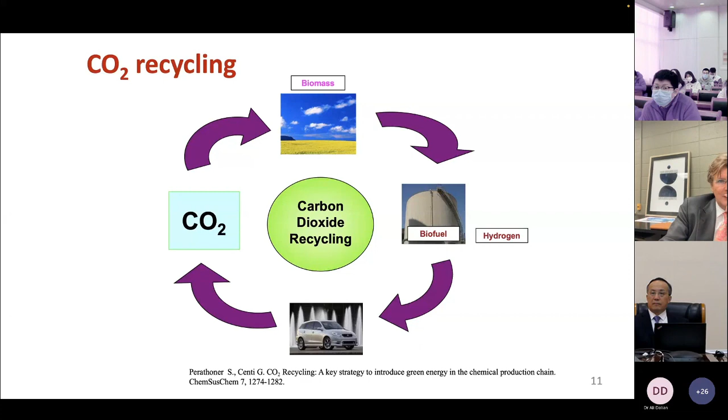Now, our applications work with a variety of systems, but I wanted to share some of our research related to hydrothermal gasification, especially supercritical flames. I did so because that's the subject Professor Fang initiated quite a long time ago, more than 20 years ago, back in Canada. I believe he was, if not the first, one of the very first people in Canada to introduce this subject in research, and we were delighted, my research group and I, to interact with Zen throughout the years.

Supercritical water is essentially water at relatively high pressure and not very high temperature, above 374 degrees C and around 218 atmospheres. It's a terrific medium because it's perhaps the best solvent you can imagine. We tested a variety of organic materials, and it takes really just a couple of milliseconds to dissolve the organics in supercritical water. Very, very powerful.

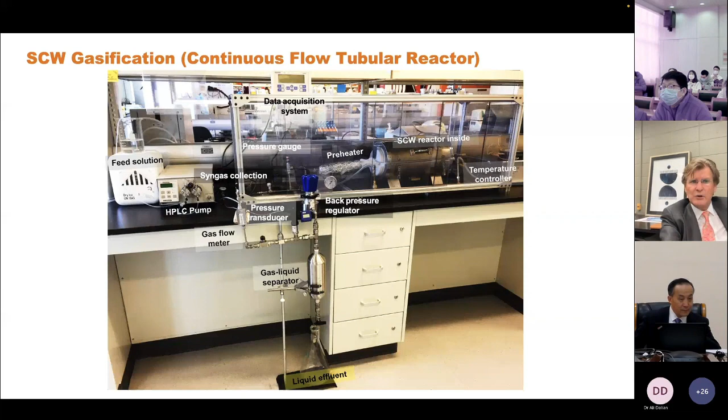We did a variety of applications, including very small applications such as the diamond anvil cell, around 500 microns in diameter, 200 microns in depth. We conducted experiments in a variety of continuous and batch flow reactors.

We used a Canadian Light Source synchrotron in order to conduct a variety of analyses in supercritical water. A synchrotron is a terrific advanced analytical technique because it allows you to measure many different things on one sample. Essentially, for a student, there are electrons running around, and several different beamlines - in our case, I think there are 28 of those beamlines - and you can analyze properties of your samples, collecting radial and axial profiles. So it's a very powerful tool. Importantly, at least in our case, it's paid for by the government, so it is relatively free of charge to researchers.

Now, those approaches allowed us to develop a variety of mechanisms of behavior of different biomasses. I'm not going to go into details here, but essentially what we wanted to do is develop a mechanistic model in order to understand a variety of physical phenomena and chemical reactions to get the type of products we wanted - starting with biomass, hydrolyzing it, catalyzing it, and then gasifying it.

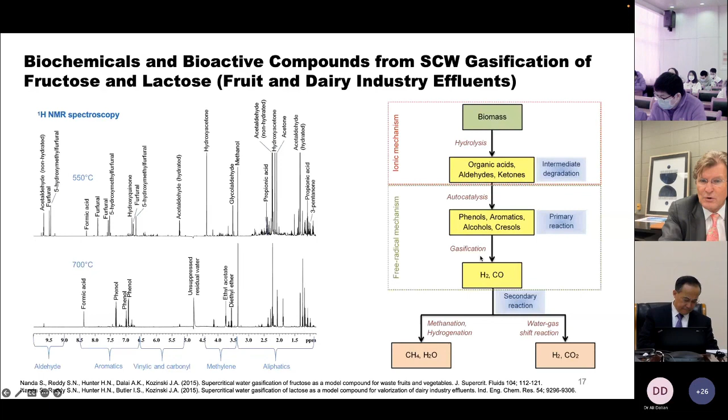In our case, the purpose was to develop either a synthetic gas, which is a combination of hydrogen and CO, and later on what we really wanted to do is focus on generating hydrogen - not just generating hydrogen per se, but rather generating hydrogen on demand. So it's just in time and just in case, in order to avoid costly storage. That's the mechanism we were able to develop.

And at the same time, if you deal with biomass, you're going to have some solid residue. We were able to develop a process for biochar that allowed us to delignify the original biomass samples, reshaping the solids so they could be used in a variety of practical applications, such as in house buildings, for example.

However, perhaps the most intriguing and interesting approach we were able to develop is working with hydrothermal flames. Now, why is it important?

That's the work that we've done with NASA. The Canadian Space Agency and NASA are interested in applying hydrothermal flames to deal with a variety of applications in space at zero gravity. We were using different organics, mixing with oxidants, and then initiating ignition using hydrothermal flames.

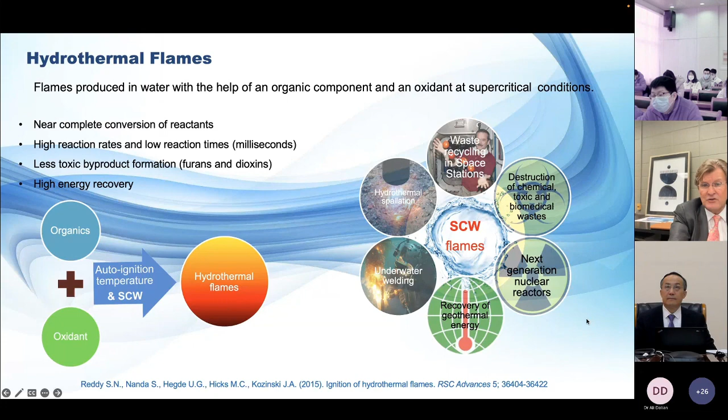In the more distant future, there's another work we're conducting on the next generation of nuclear reactors, generation 4 nuclear reactors, and we tentatively obtained some interesting results, although still preliminary, with regards to significantly increasing the efficiency of that generation of nuclear reactors. Countries like China or Canada are investing quite a lot in nuclear energy, so it would be quite important to understand these applications.

Now, the experiments that we are conducting are being conducted in the reactor that was developed, designed, and manufactured at NASA, and then shipped to us here in Canada. It's a beautiful piece of engineering. Essentially, the key element of it is here.

This is the reaction chamber that allows us to both monitor and collect samples from the reaction area where we develop a flame, and we're able to measure temperature both along the flame axis but also across the flame radius. So that is the essence of the SCW, NASA's SCW flame machine.

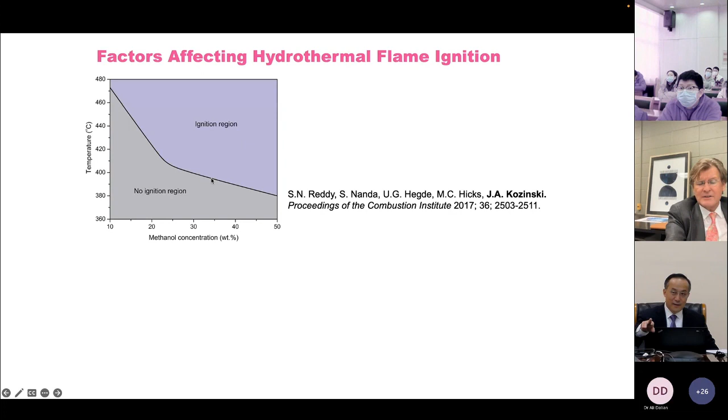We are now working on the next generation of it. Whenever you work with flames, and especially very exotic and unorthodox flames in water, especially supercritical water, the key element to understand is ignition. How to go from no ignition region to ignition region is going to be critical, especially as we potentially would like to use this kind of propulsion for Mars rovers some years in the future.

There are a variety of parameters that define the behavior of flames and also influence ignition. In general, what we would like to do is ignite those unorthodox flames at as low a temperature as we can and as quickly as possible. So we analyze a variety of those parameters, and I'll show just a few that are perhaps important.

One of the key parameters was the temperature of the oxidizing agent. In our case, we were using a variety of oxidants - it could be hydrogen peroxide, oxygen, or air - and depending on the temperature, the higher the temperature of the oxidant, the lower the ignition period, and it's a significant difference, almost 3 times lower. That translates to tremendous savings from the economic perspective.

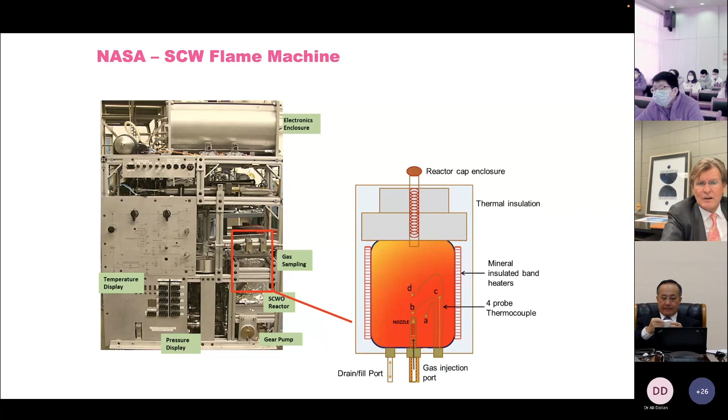For the type of hydrothermal flames, some simple fundamental observations are not very easy to get done, especially if we want to make sure we properly understand the parametric studies, because of course, how it works - you have to fix all of the other parameters and then see how the temperature influences the parameter you're interested in, and then you have to multiply those experiments and involve other parameters.

Then what I wanted to do is very quickly share with you the tests that we were conducting together with NASA at zero gravity. You have 5 minutes. Yes. Oh, that's perhaps the last slide.

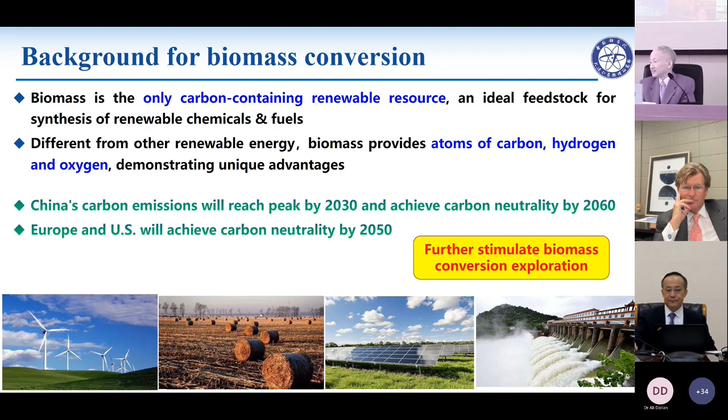China, probably you know, declared it will reach carbon peak by 2030 and achieve carbon neutrality by 2060. This is a very big country, and also we are a developing country, so this is a very tough task for our country. But this carbon neutrality policy will further stimulate biomass conversion exploration research, not only in China but also around the world. Europe and the United States also declared carbon neutrality by 2050. This is China's strategy about carbon neutrality.

China is a very big country, so we need different kinds of energy. Any one kind of energy is not enough for China. So now, oil, we import more than 70%, and natural gas about 50%. And coal, we are very rich in coal, so we can use it for several hundred years. This is our main energy source.

But now in China we are developing wind and solar energy, ranking number one in the world. We also pay much attention to biomass, so this is renewable energy in China. We also pay much attention to nuclear energy. We are very happy to know the United States declared yesterday a very big breakthrough for nuclear energy, and we also have a very big team working on nuclear energy in China. So this is a comprehensive system in China. We need to combine all the fossil energy, renewable energy, and nuclear energy together to build a comprehensive energy system.

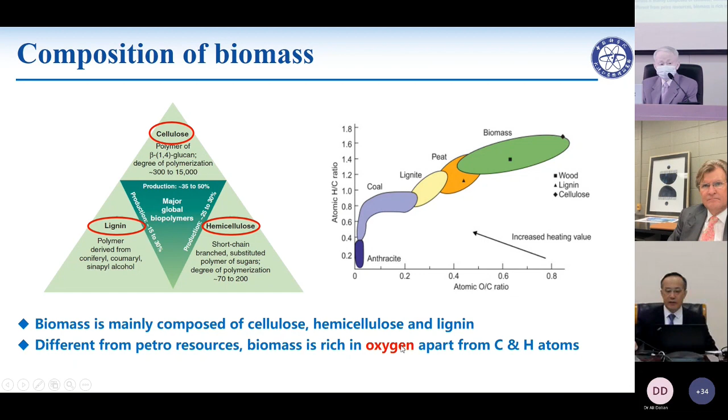Biomass is mainly composed of cellulose, hemicellulose, and lignin. Particularly, oxygen is present apart from carbon and hydrogen. This is a very unique property of biomass.

So why biomass to glycol? Because the title of my presentation is ethylene glycol. Glycol is oxygen-containing, so we can use all the atoms, not only carbon and hydrogen, but also oxygen. So this is ethylene glycol and 1,2-propylene glycol — crucial bulk chemicals.

Currently, ethylene glycol is produced from the petroleum source. The consumption of glycols is more than 30 million tons per year, and it has increased about 5% every year during the last decades. The catalytic conversion of biomass to ethylene glycol is highly attractive due to its renewable feedstock, high atom economy, and green process. So we pay much attention to producing ethylene glycol from biomass.

The challenge in biomass conversion to ethylene glycol involves hemicellulose and lignin. Particularly, we pay much attention to cellulose, which accounts for more than one-third of lignocellulose.

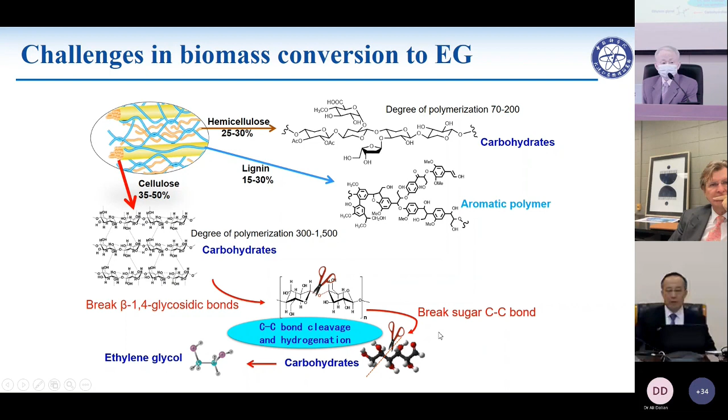So the challenge is to break the beta 1,4 glycosidic bond to produce polysaccharide, and then to break the carbon-carbon bond to produce such kinds of carbohydrates. Then, further breaking the carbon-carbon bond and doing the hydrogenation reaction, we can produce ethylene glycol. This is a very promising reaction, but we have many challenges in how to selectively convert the beta 1,4 glycosidic bond and how to selectively convert the carbon-carbon bond.

I mentioned ethylene glycol is currently from the petroleum route, produced from ethylene in the majority of cases. Also in China, because coal is very rich, we can produce ethylene glycol through carbon-one chemistry: from coal to produce syngas, and then from syngas to produce ethylene glycol. But now biomass is challenging yet very promising, because we can use not only carbon and hydrogen, but also the oxygen in the biomass. So this has very good atom economy, and we pay much attention to this process.

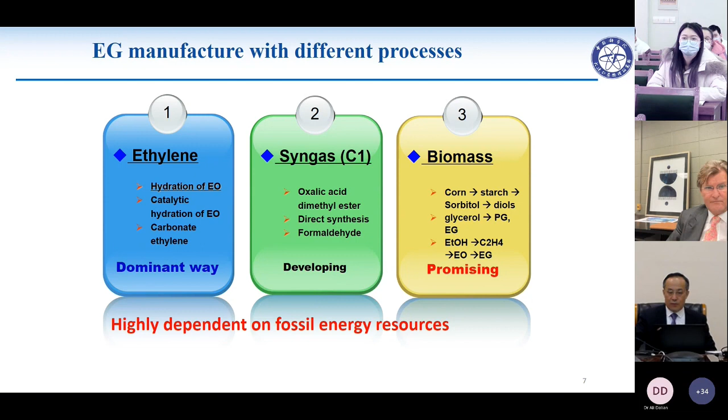We are very lucky—one of my students, Miss Ji Na, is now a professor at Tianjin University in China. 14 years ago we published a paper in Angewandte Chemie; now it's more than 15 years. We were very lucky to find a very unique catalyst: nickel-promoted tungsten carbide supported on active carbon. So we can go from cellulose in one pot to produce ethylene glycol. This is a very new reaction, and we are very happy to discover it. We also filed several patents during the last decades for this new process.

After the first paper, we needed to understand the reaction mechanism—why we can use such a catalyst to selectively convert cellulose finally into ethylene glycol. Now we understand the first step: using an acid catalyst to do hydrolysis from cellulose to produce polysaccharide or glucose. Then we have a retro-aldol condensation reaction by the tungsten catalyst, which produces glycolaldehyde. This is a very important intermediate compound for our process. Then from glycolaldehyde, by ruthenium or nickel hydrogenation reaction, we can produce ethylene glycol. This is a very interesting new reaction from cellulose to produce ethylene glycol.

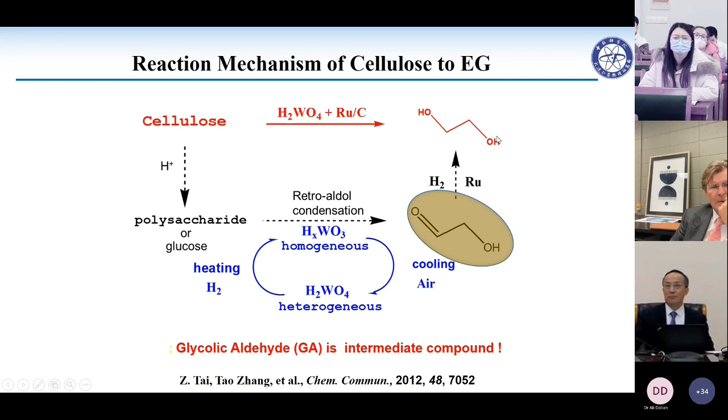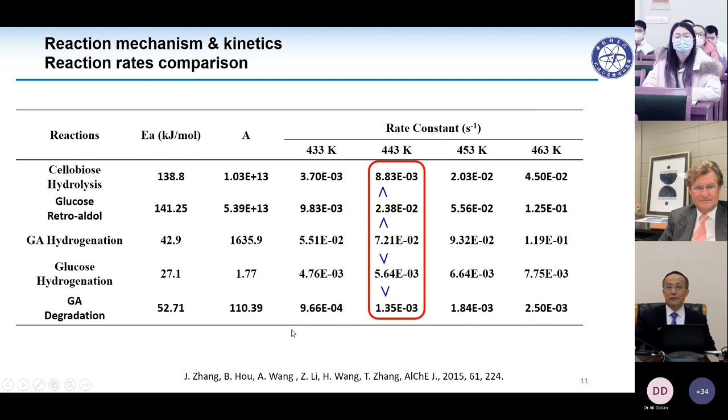We also did a very detailed kinetics study, comparing reaction rates for different steps: cellobiose hydrolysis, retro-aldol reaction, glucose hydrogenation reaction, and glycolaldehyde degradation. Our results show that the glycolaldehyde hydrogenation reaction rate is very fast compared with the retro-aldol reaction, and very fast compared with the hydrolysis reaction. So the hydrolysis reaction is the rate-determining step.

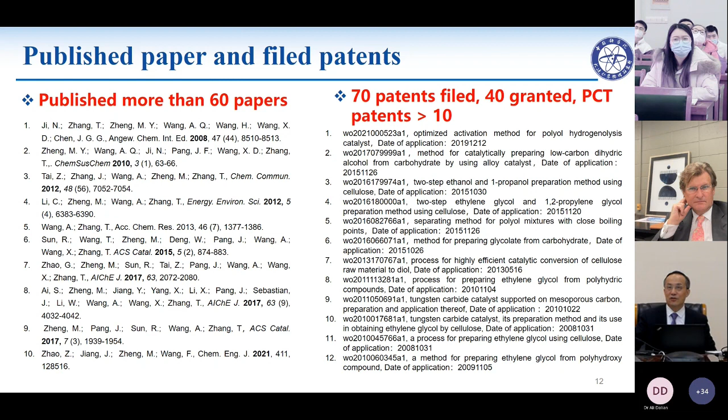During the last decades, we published more than 60 papers to study the details of such kind of reaction, and we filed 70 patents. We tried to commercialize such kind of process, so we filed a lot of patents during the last decades.

Because of time limit, I would like to mention several milestones for our new process. We started the research of biomass conversion from 2006. After 2 years, we discovered a new reaction for cellulose to produce ethylene glycol. We did a very detailed study of the reaction mechanism, and we designed and obtained a low-cost catalyst.

This is very key, very important for the commercialization reaction. We also needed to try our whole biomass conversion, because the fundamental research used pure cellulose. But for the commercialization process, we need to use the whole biomass, and we also need to design a highly efficient process.

For the industrial demonstration during the last 4 years, from 2018 to this year, we used about 3 to 4 years to make an industrial demonstration in China. We are almost close to success for this new process.

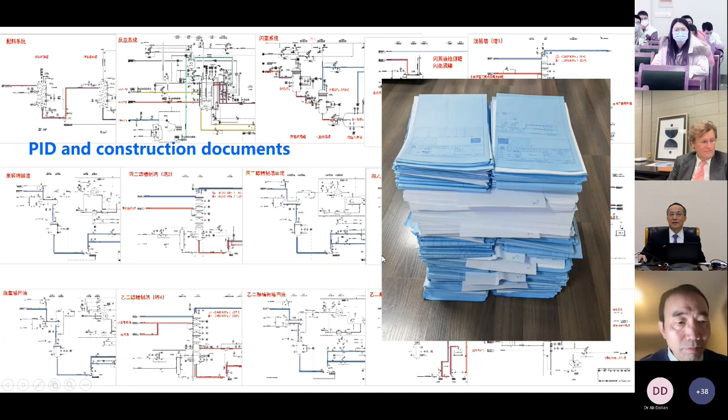This is a huge work for the design of such a 1,000 ton pilot plant. You can find the design documents - it's a huge amount. And also the construction site involved a lot of work.

The container, reactors, and finally, by the end of last year, we finished the construction. Our pilot demonstration is a 1,000 ton per year cellulose to bio-EG plant in Henan, Puyang, China. This is probably the first pilot demonstration from cellulose to bio-ethylene glycol in the world.

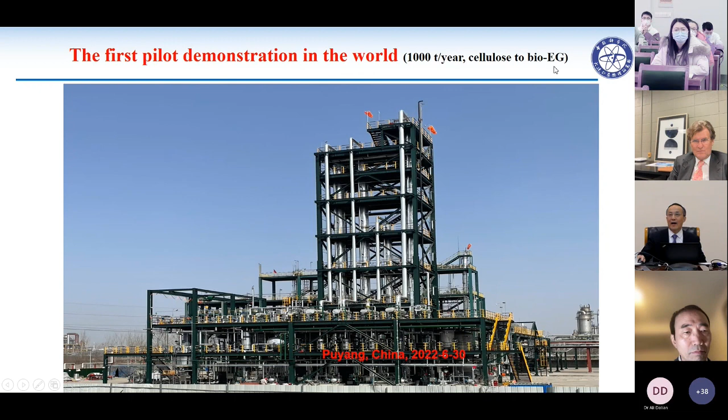This is our product, bio-ethylene glycol. You can find the purity - the selectivity is very good. We can obtain about 85% selectivity. The purity is more than 99%.

I would like to try to summarize our DLEG pilot demonstration. The design of the reactor at a metric scale is verified. Using this kind of reactor, we can obtain very good mass and heat transfer.

The catalyst performance has also been verified. The selectivity to ethylene glycol is higher than 85%, even better than the result in our laboratory. The result from the pilot at 1,000 ton per year has better selectivity than our laboratory result, which was about 70%.

The product distillation system is also tested. We can now have a purity of more than 99%. In the near future, we will improve our distillation process so we can obtain even higher purity for the ethylene glycol.

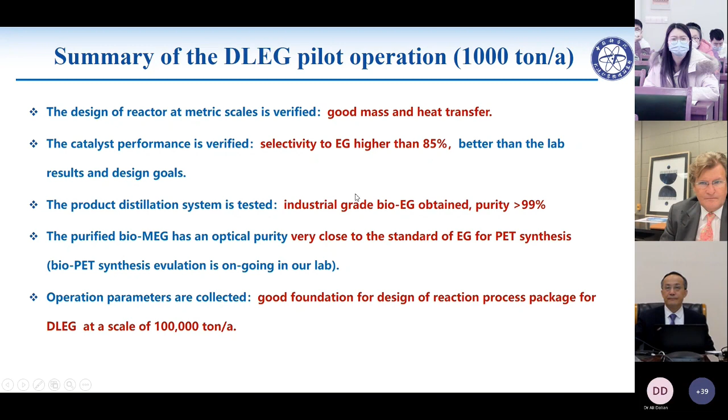Now for the perspective and conclusion. You can find our systematic study and endeavors have been made on our new process for biomass conversion to ethylene glycol over the past decades. This progress includes the robust and low-cost catalyst, reaction kinetics, highly efficient reaction system, feedstock influence on the reaction, and bio-EG purification and application for PET synthesis.

These paved a solid way for DLEG process application at a large scale in the near future. The pilot at a scale of 1,000 ton per year has been built and operated successfully, making a good foundation for DLEG industrial application in the near future, to promote the DLEG... Okay, almost finished.

I would like to mention some opportunity and challenge for whole biomass conversion. So the industry currently, based on biomass and fossil energy, you can find petroleum, natural gas, and coal. You can produce gasoline, kerosene, diesel, benzene, toluene, xylene, and more.

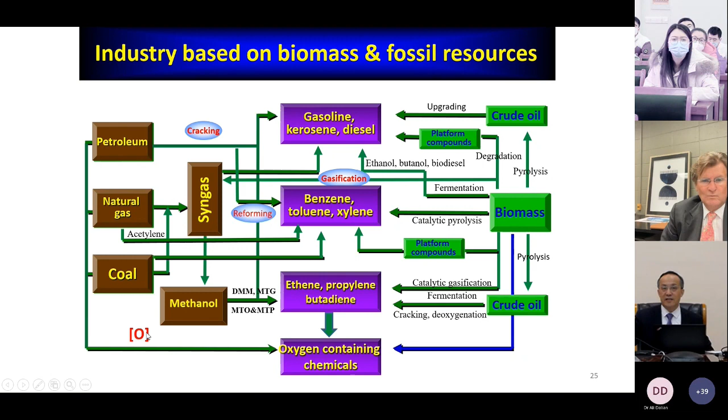But for oxygen-containing chemicals, now from petroleum, you need to do an oxidation reaction to put in the oxygen. For biomass, this is very good because you don't need to do oxidation. So this is very unique about biomass for producing oxygen-containing chemicals.

The advantage is that oxygen is very important for biomass conversion. We have various functional groups that are abundant, cheap, and renewable. The 5 and 6 member ring structures facilitate the synthesis of new materials for the future. This is particularly zero carbon emission, so this is very important for biomass conversion compared with fossil energy.

But we have a very big challenge because of the very complex structure and also very limited thermodynamic data, and also the recycling of the catalyst. We need a low-cost catalyst, and we have a lot of challenges in the future. We need to do a lot of work, and for biomass resources, we need to design new technology.

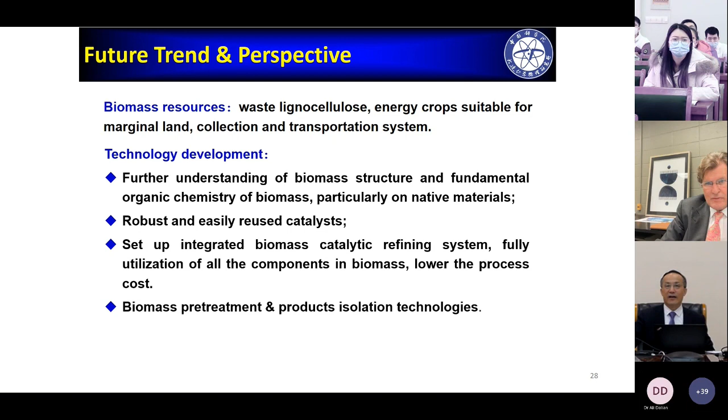To make such biomass conversion available in the near future for commercialization. I would like to thank my colleagues, Professor Aiqin Wang and Professor Zheng, who helped me do a lot of work. And also I need to thank my international cooperators, Professor Huber in the United States, Professor Mou in Taiwan.

And Professor Wilson, Adam Lee in the UK, and Professor Bert in Belgium. And also, of course, I need to thank our government and our partner companies for providing financial support for our fundamental research and also for the pilot demonstration.

This is Dalian Institute of Chemical Physics, located in Dalian, a beautiful campus. I would like to invite all friends to visit Dalian in the near future. Thank you.

Thank you so very much for the presentation. It's truly a comprehensive one, and congratulations on doing something that is not easy to get done, which is taking it in a transformative way from a scientific breakthrough to industrial applications, plus developing a very elegant logo. So very well done indeed.

Let's open up your presentation for questions. Do we have some questions? Hello, Professor Zhang, please go ahead.

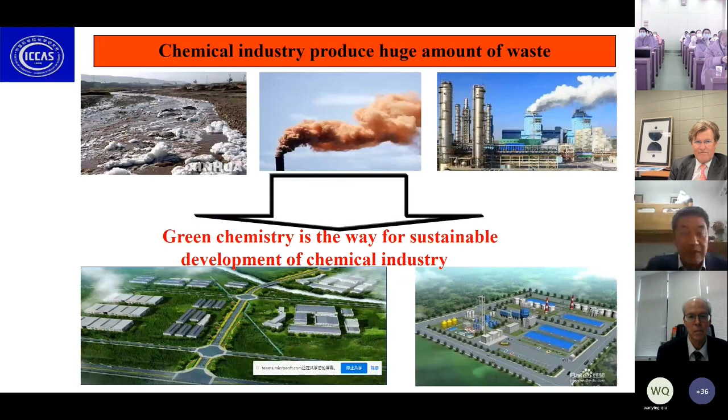I would like to also talk about green carbon science. We know that carbon is also very important for human beings because in our body we have about 18% carbon. Without carbon, we have no human beings, no ourselves. We are wearing carbon, we are eating carbon, we are living in carbon, we are using carbon anywhere.

And from the carbon resource point of view, carbon resources are also indispensable for us. We have non-renewable carbon resources such as coal, petroleum, and natural gas. We also have renewable carbon resources such as biomass and CO2.

However, when we are using carbon, we cause many problems - we make pollution. Also, the non-renewable fossil resources, they are non-renewable, they will finish in the future. So how to use carbon resources efficiently and cleanly is also a very important task for us.

We are meeting a challenge here. In this situation, Professor Mingyuan He proposed the idea of green carbon science, and we wrote 3 papers about green carbon science. We gave a definition of the problems when using carbon resources, how to solve these problems, and how this green carbon science relates to carbon neutrality.

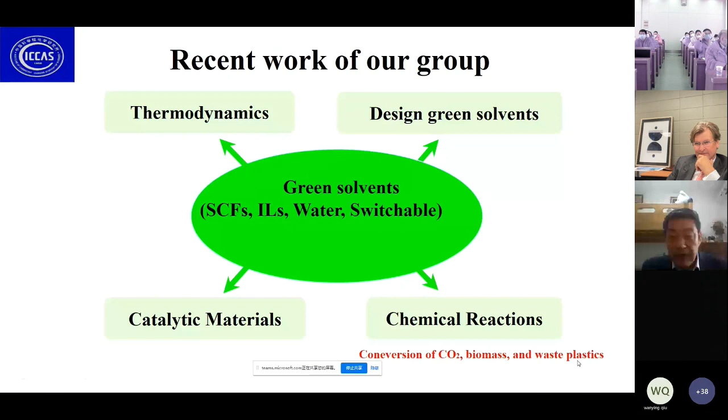Now, we know that using this renewable and recyclable carbon resource is crucial for sustainable development, and they can be used to convert into chemicals, fuels, and materials. Now I would like to talk, because today is about biomass, I would like to give some examples about our recent work on conversion of biomass into chemicals and fuels.

And this is very important because for human beings, we have two important issues: one is sustainable development, another is carbon neutrality. Actually, we know that utilization of biomass relates to both of these very important issues.

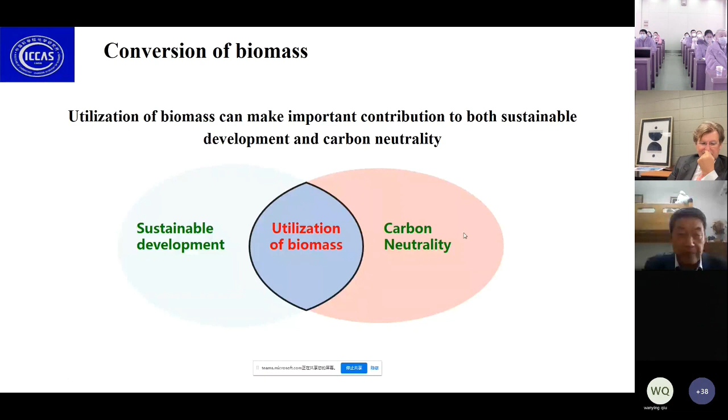Here, we design a number of catalyst-green solvent systems, and we develop some new routes for biomass conversion. We can convert biomass into surfactants, ketones, alcohols, acids, organic acids, benzene, phenol, and nitrogen-containing chemicals.

I'll give some examples here. We know that lignin is a very important biomass, and it is abundant, and it is also a byproduct in some chemical industries such as the paper industry. Each year we produce about 50 million tons of lignin. How do we use this lignin?

First, for example, here we design some catalysts in water solvent, and we can efficiently convert ethers into ketones, and the yield can be as high as 96%.

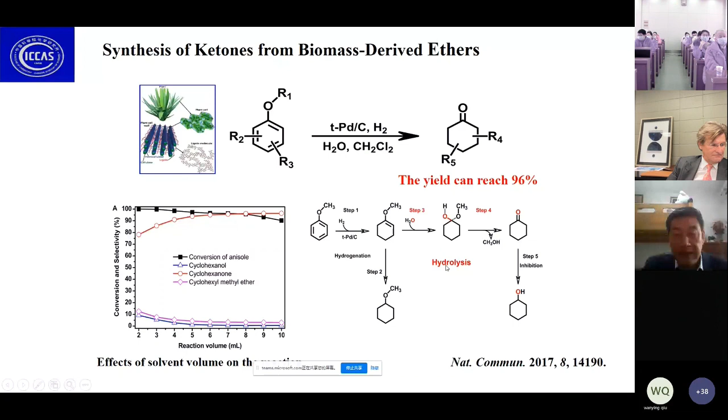Another example is anisole. We know we can get this from natural products, and we can also obtain this chemical from depolymerization of lignin. If it reacts with carbon monoxide (CO), we can get esters. That's a very important reaction, but it's very difficult to realize.

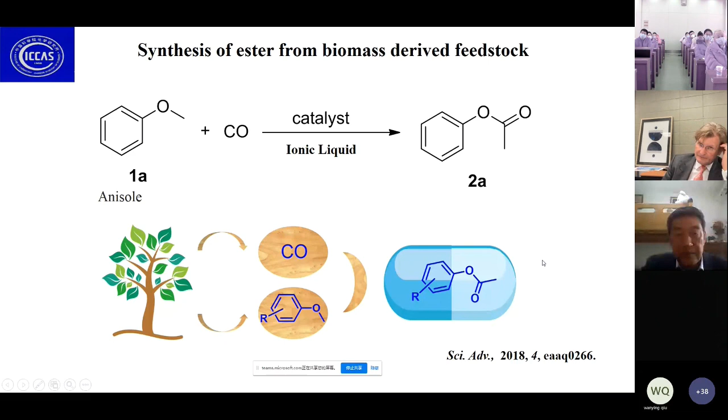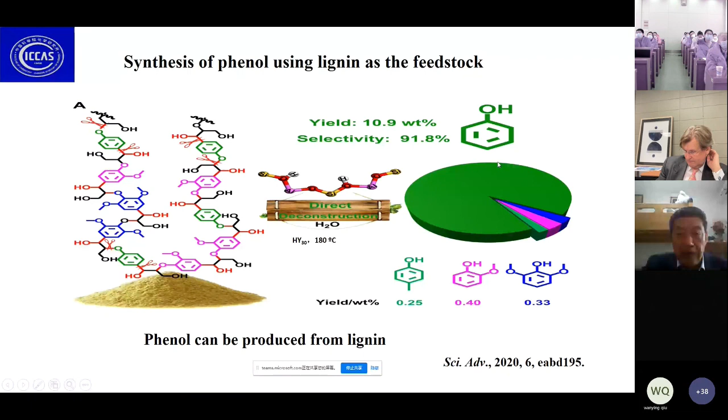Phenol is a very important chemical product. If we can produce phenol from lignin, that is very desirable. We develop some molecular sieve catalyst in water, combined with water, and we can carry out this reaction. The selectivity can be higher than 90%, and the yield of phenol can be about 11%. Actually, we convert most of the group into phenol here, and this is a very green and efficient route.

Also, benzene is another very important chemical. If we can produce benzene from lignin, it's also a very interesting reaction. But cleavage of carbon and carbon-oxygen chemical bonds is key for carrying out this reaction.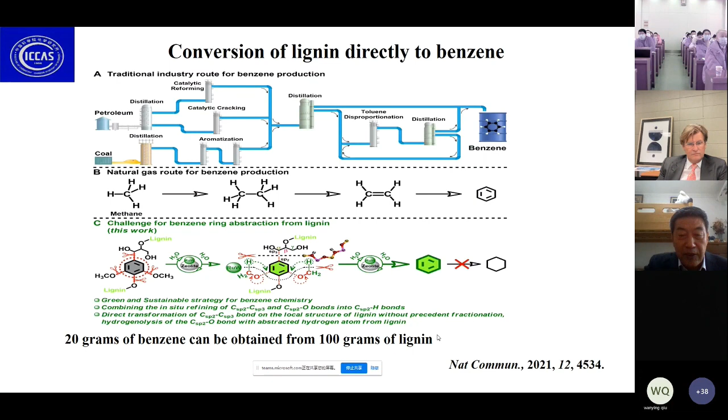Based on control experiments and theoretical calculation, we propose the reaction pathway you see here, but I will not discuss this in detail today.

We know that this one is a platform chemical for utilization of lignin. Because of the OH group and this ether group, we can get different chemicals. But we know that how to selectively get one chemical is very important.

Professor Zhang in Dalian University proposed and carried out the first work on single atom catalysts, which is very unique for many reactions. So we use single atom ruthenium as a catalyst. Because of the unique feature of this kind of catalyst, the yield can approach 100%. That means no byproduct can be produced.

We studied why single atom catalysts are very efficient based on theoretical calculation and experiments. We gave the reaction pathway. Anyway, we think single atom catalysts really have their unique features for many reactions. I think that is very promising.

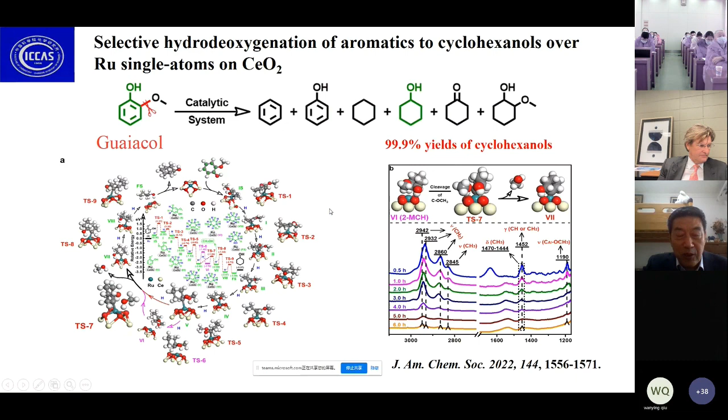We know that when producing chemicals from lignin, we think about cleaving or depolymerizing them into chemicals, but usually we get mixtures. How to get pure chemical from lignin conversion is very interesting. Our idea is that if we selectively convert and utilize one group, one part of lignin, we can get pure chemical.

We know that in lignin there are more than 10% of this kind of group, the methyl group, CH3 group. There are many groups like this. If we can selectively convert this, we can get pure chemical.

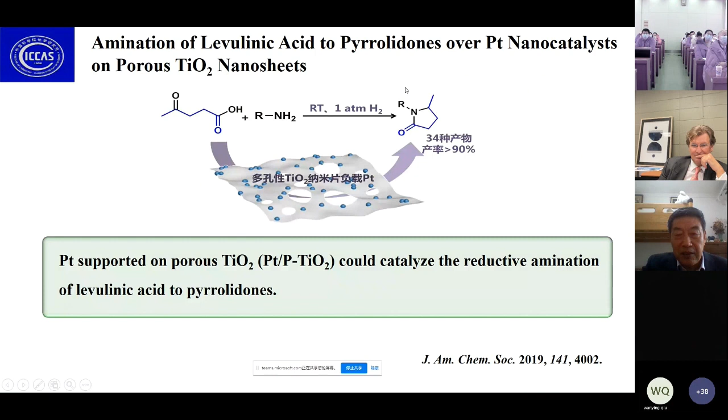So we design some catalysts, for example with platinum, designed on a support here. We can carry out this reaction very efficiently for many different reactants. We tried more than 30 kinds of substrates and can get this kind of chemical very efficiently.

Single atom catalysts are very useful and very powerful for many reactions. I'd like to give another example here. We know that HMF is a platform chemical for conversion of cellulose. If this chemical, called furfural, you see here, is also useful. How to carry out this reaction, converting HMF to this.

People have done a lot of work on this, but the problem is that on this chemical we have 2 groups that can be hydrogenated together at the same time. How to selectively convert this OH group is challenging. Other people react with some other chemicals to get one chemical intermediate, then hydrogenate this one to get the final product, so they have two steps. We use a single atom palladium catalyst instead.

Supported on some support, we found that without this intermediate step, in just one step, we can convert this one into the product with a yield larger than 99%. We studied the reaction pathway and mechanism, but since time is limited I cannot discuss this in detail. Anyway, single atom catalysts are very useful and very promising.

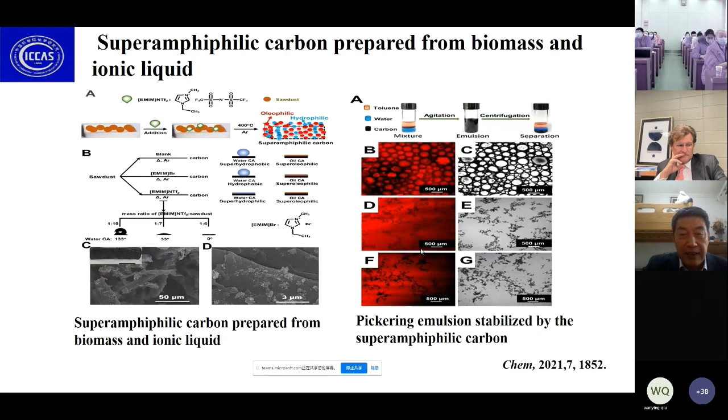We can use biomass to produce some catalysts. For example, phytic acid here has 6 coordination groups, polar groups, that can coordinate with different metals. Using this natural product-derived chemical, we can produce some porous catalysts. We get some complexes with different metals that are porous and have a very wide size distribution.

Because this is a multi-porous material with different sizes of pores, we found they are very efficient for this reaction.

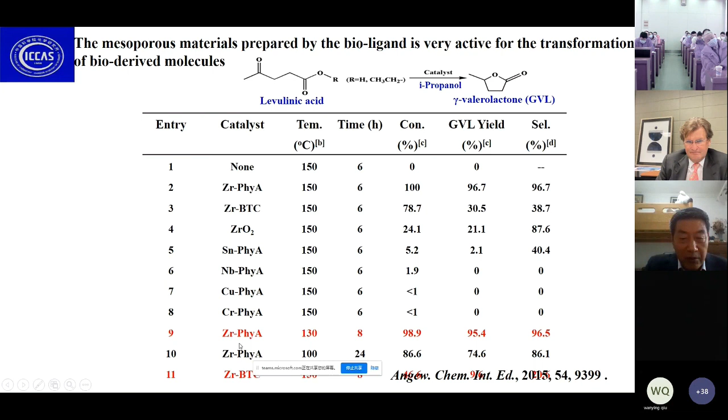That is a platform chemical of cellulose, and we can have this reaction too. People know this reaction, but our new catalyst is very efficient. You see here, for example, using our catalyst is 99%.

You see here about 96% yield, but if we use the same metal using MOF, that means the metal organic framework, the conversion selectivity is much lower. The selectivity of our catalyst is also very stable here. For another example, we usually use metal catalysts by homogeneous methods, or we can support them on some support. But we found that if we can prepare porous metal without any support, with large pore and metal pore, this kind of structure is very efficient for these reactions.

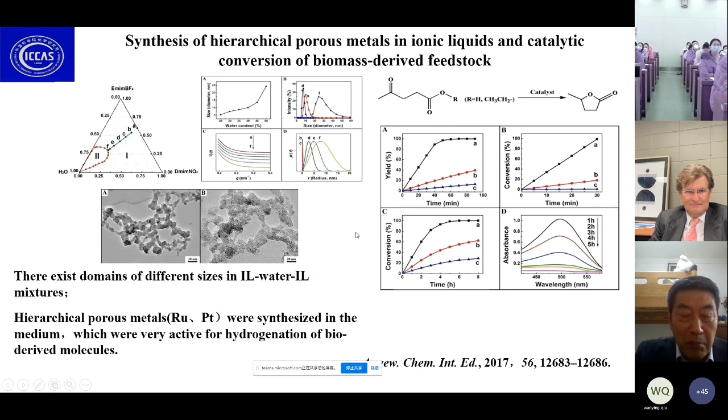You see, for our catalyst, we can reach 100% yield very quickly, but for commercial catalyst with the same amount of metal, the conversion efficiency is much lower. That means porous, multi-porous metals can be much more efficient than supported catalysts for some reactions. I just want to show this.

I also gave another example for electrochemical conversion. We have produced lignin here, and by electrochemical reaction we can promote this phenol reaction with water. We can get two chemicals at the same time, two very important chemicals. The hydrogen in water can be used to produce this one, and in the anode, the oxygen can be used for this reaction. That means all water and these chemicals are used in the reaction. If the yield can be 100%, that is very high.

Also, we carry out some photocatalytic reactions. For example, for hydrogenation of this kind of chemical, people have done this for many years, and oxidation of cellulose is also interesting. By photocatalytic reaction using water as a hydrogen source and oxygen source, we can oxidize this chemical from cellulose into different useful chemicals, while hydrogen can be used for this.

That means photocatalysis is also very promising for conversion of biomass, because time is limited. I just mentioned that utilization of biomass still has a long way to go. In the future, we should consider the special structure of biomass to develop more efficient reaction routes. But I will not discuss this in detail.

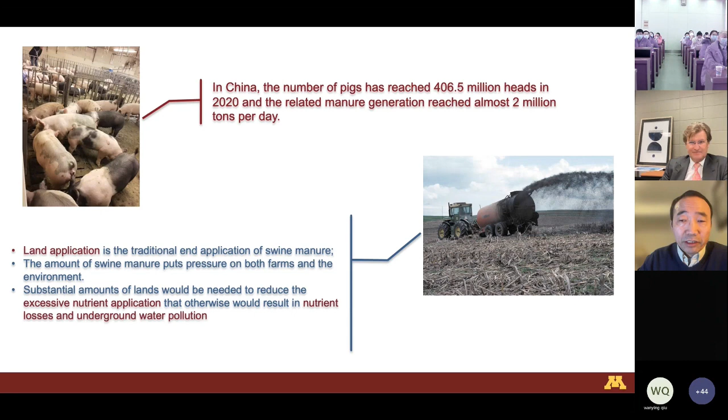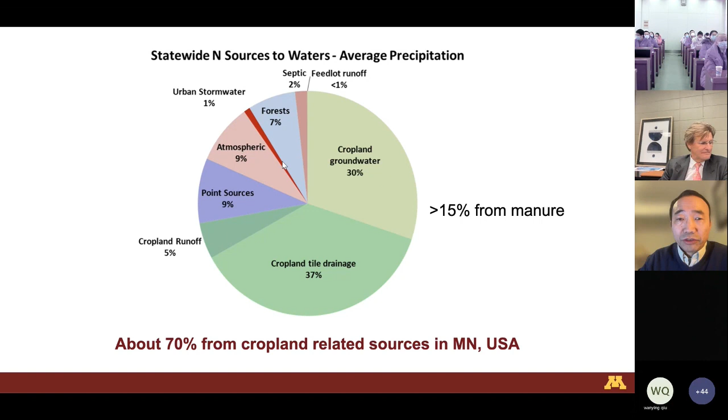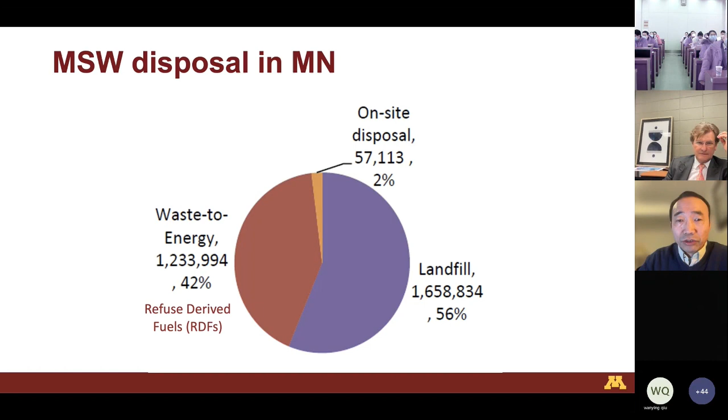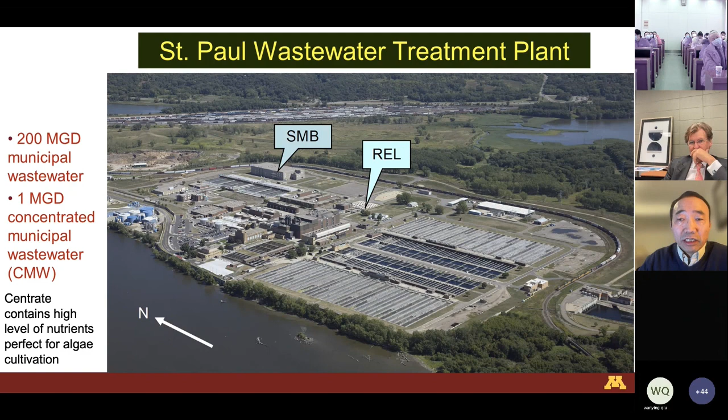This centrate contains a very high level of nutrients, and this is actually the characteristic of the centrate wastewater. The nutrient profile is actually perfect for algae production. Therefore, we have successfully developed algae production using the centrate wastewater, and we have demonstrated the systems in our research and outreach centers and also at wastewater treatment plants.

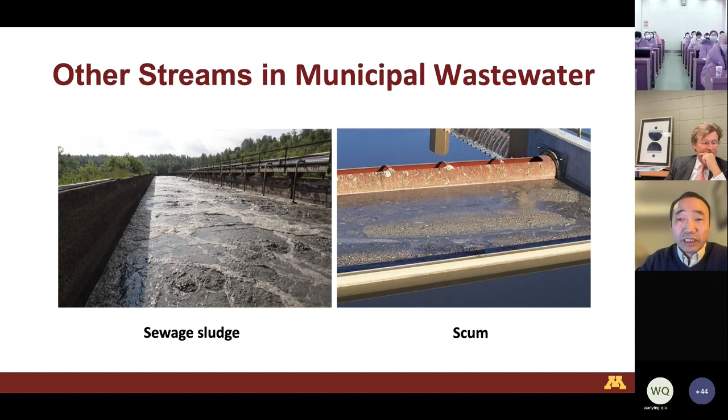Other streams of municipal wastewater, such as sewage sludge and scum, also contain a lot of energy that could be used for heat, power, and fuel production. For example, scum is the material floating on the wastewater - it actually contains a lot of oils and is a very good feedstock for biodiesel production. We have developed a patented technology to efficiently use the scum for biodiesel production, pretty much completely utilizing all of the heavily used oils with very high free fatty acid content.

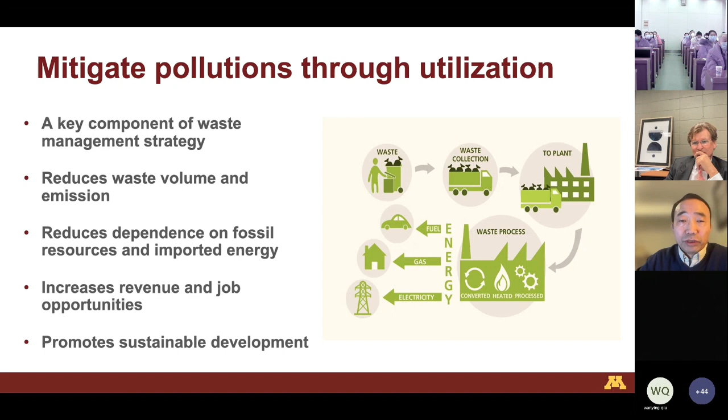So all these wastes present us with many problems, but many opportunities too. We can use them to produce food and feed, and convert them to energy, chemicals, and materials. A key component of this waste management strategy should be treatment through utilization, because that has many advantages compared to treatment itself. So let's look at various novel treatment-through-utilization technologies.

We first add a carbon source like corn stover to adjust the C:N ratio, and then we use thermal hydrolysis, and then we remove the AD inhibitors like ammonia, because too high a level of ammonia will inhibit the methanogens for methane production. After that, we use this pretreated wastewater for AD to produce methane, then use algae cultivation and hydroponic vegetable production, and then use biochar to filter and condition the wastewater.

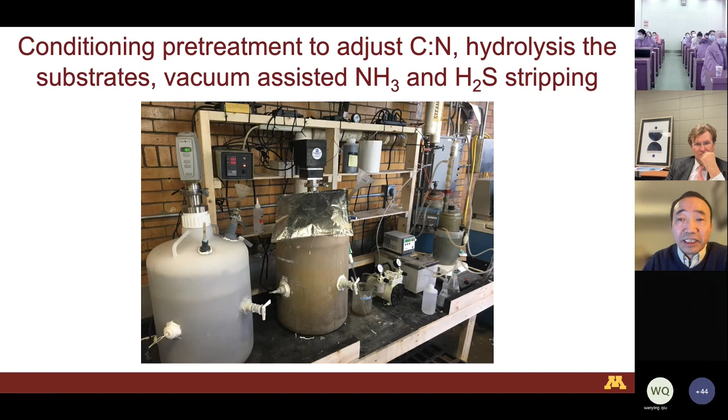This way we can remove almost all of the nutrients from the wastewater and recycle or reuse it. This is a conditioning pretreatment system to adjust the C:N ratio, hydrolyze the substrate, and remove AD inhibitors such as ammonia and hydrogen sulfide using a vacuum.

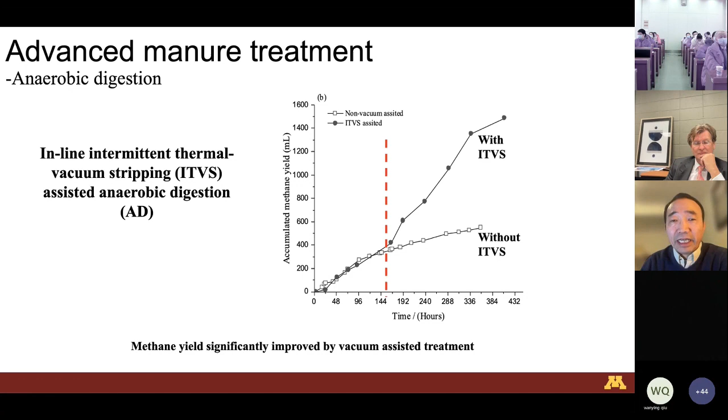This conditioned and pretreated wastewater can then go through AD. You can see here that without this kind of pretreatment process, the AD production is very low, but with this pretreatment, methane generation and methane yield increase dramatically. The post-AD effluent may still contain too much solids and other hazardous components, which can inhibit algae growth.

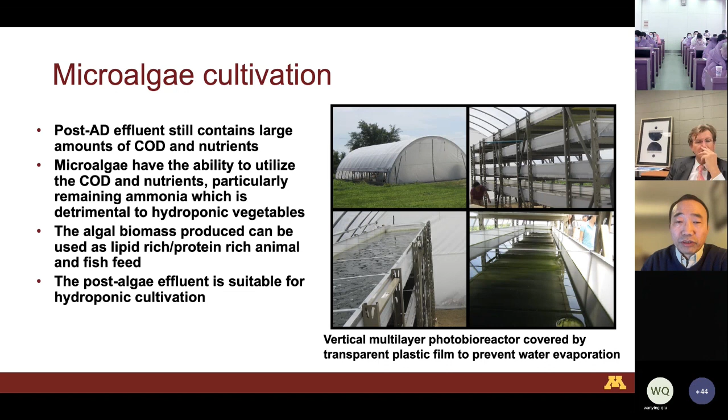So we use biochar filtration to remove these, and the biochar could also help clarify the water for the algae cultivation. This is post-AD effluent, because it still contains larger amounts of COD and other nutrients. So with this biochar conditioning, it can then be used for algae cultivation.

Microalgae can serve as a second step nutrient and heavy metal removal. It is very suitable for wastewater containing less than 200 ppm of ammonia. It can use both ammonia and nitrate nitrogen and other nutrients too. Microalgae often have high lipid content, and can sometimes be enriched with omega-3 fatty acids and polyunsaturated fatty acids, making them very good feed for animals, fish, and so on.

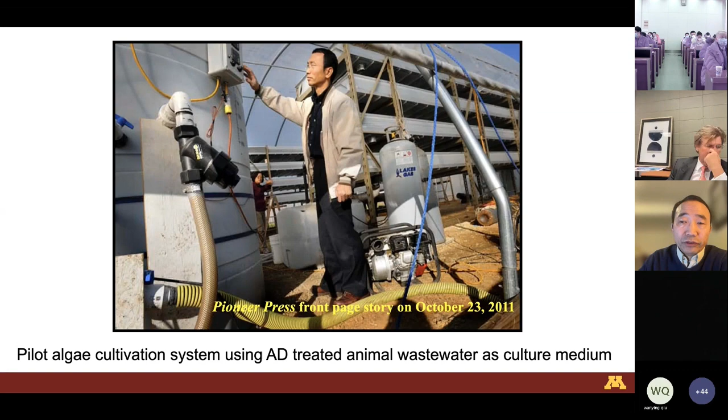After microalgae cultivation, the effluent still contains a reasonable amount of nutrients that can support hydroponic growth of vegetables and herbs. We've tested different kinds of hydroponic systems, and many vegetables and herbs grow well hydroponically. We've also worked with commercial urban indoor hydroponic and aquaponic production facilities.

Manure solids, food and vegetable processing waste, restaurant waste, fish scrap, and so on can also support black soldier fly larva production, treating all this waste through the larvae. The conversion rate is actually fairly high: about 2 pounds of waste can produce about 1 pound of black soldier fly larva.

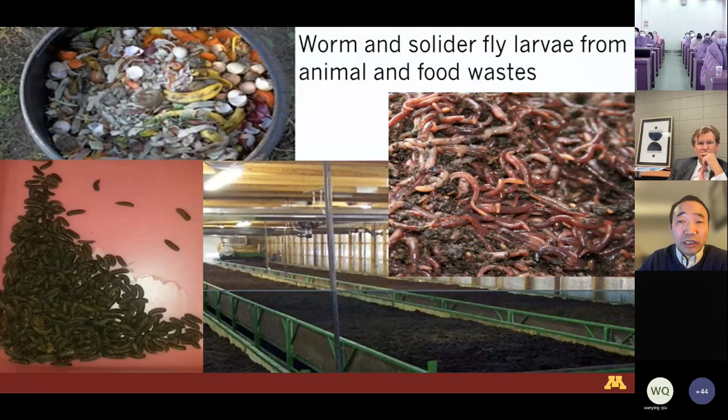This is the black soldier fly larva production, or you can also produce it by worm. These worms and black soldier fly larvae are actually very good animal and fish feed.

Biochar can be used to condition the water in between all these processes, and also for final water recycling and discharge. Biochar can actually be produced from biomass pyrolysis, which I will talk about more later.

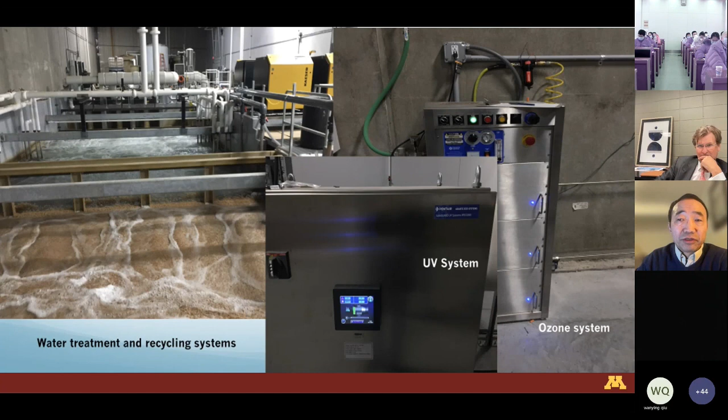This water can then be further treated using UV, ozone, or some kind of non-thermal plasma system for recycling or final discharge. Now let's look at solid waste utilization using the microwave-assisted pyrolysis technology we have developed.

We have converted solid waste into fuels, chemicals, materials, hydrogen, and others like biochar too. Recycling or converting solid waste such as biomass and waste plastics into energy and chemicals can be a very attractive solution for solid waste utilization. There are many waste-to-energy and chemical technologies that can convert solid feedstock into different kinds of products, and pyrolysis is becoming

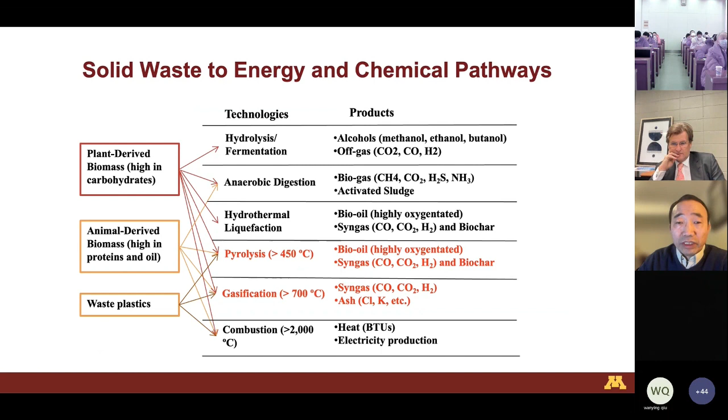one of the most promising pathways, gaining more and more interest right now, especially for waste plastic utilization, for example. We focus on a microwave-assisted pyrolysis, or MAP, system, mainly because microwave is actually a very promising technique with unique

advantages. One, it's selective heating, so materials with different dielectric properties are heated by microwave irradiation to different degrees. It's also volumetric heating, so microwave can penetrate more uniformly throughout the volume of a material of a certain size, delivering energy more evenly. The inside can even be heated up faster, so heat transfer and mass transfer go in the same direction. It's also rapid heating, because microwave heating is an energy conversion process that doesn't have to be limited by heat transfer. So there's a lot of advantages.

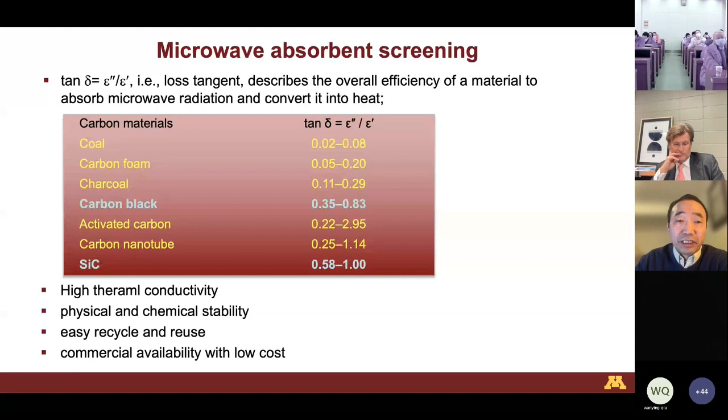Unfortunately, not all materials can absorb microwave efficiently. Therefore, we have to use microwave absorbents to help improve the heating rate and also improve the temperature uniformity for the pyrolysis. Over the years, we have developed many types of MAP systems, from bench top to pilot scale to commercial systems.

This is actually a stationary MAP system we have developed. Feedstock comes in here, goes through this microwave pyrolysis reactor, and vapor comes through here to be condensed to produce bio-oils, while the char can be gasified at the bottom stage, producing syngas and char.

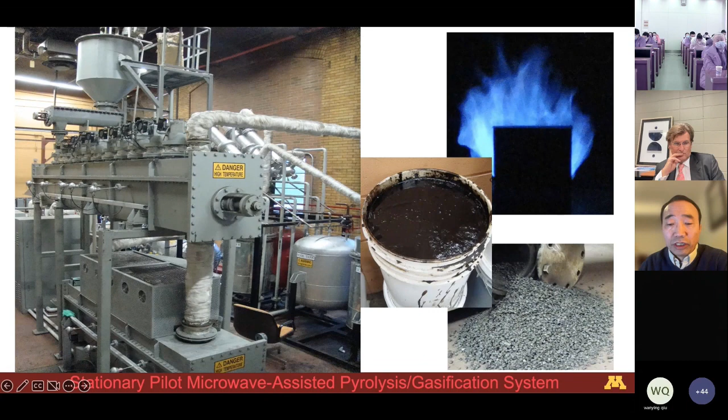So it doesn't rely on outside power or water to function, and we can convert all kinds of bulky biomass or bulky waste plastic, those low density materials, on site, and bring back only the fuels, chemicals, or materials.

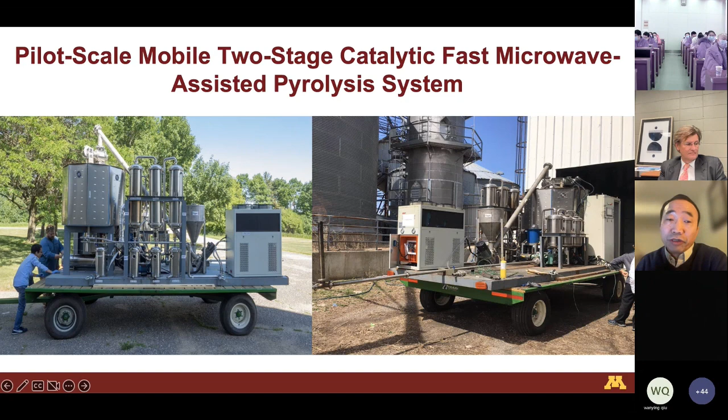This is an example of these CMAG applications in sewage sludge gasification. So this is the sewage sludge and wood pellets, and you can actually produce a steady kind of syngas.

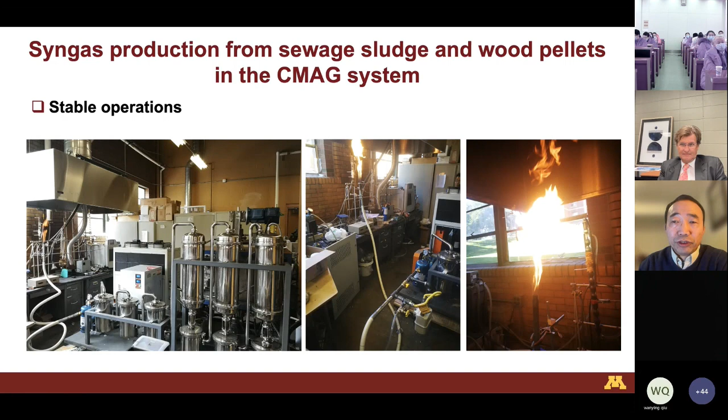Here are some pictures showing the flare of the produced syngas. At a gasification temperature of 800 degrees, the CMAG system actually obtains a much higher quality syngas with a low heating value of 18 megajoules per cubic meter, and about 67% volume of the syngas is hydrogen and CO, because it doesn't use a carrying gas as in the case of fluidized bed, for example.

So we compare with a range of other kinds of gasifiers, including fluidized bed, and it actually outperforms many of these conventional gasification processes. Here's the application of the CMAP in plastic pyrolysis.

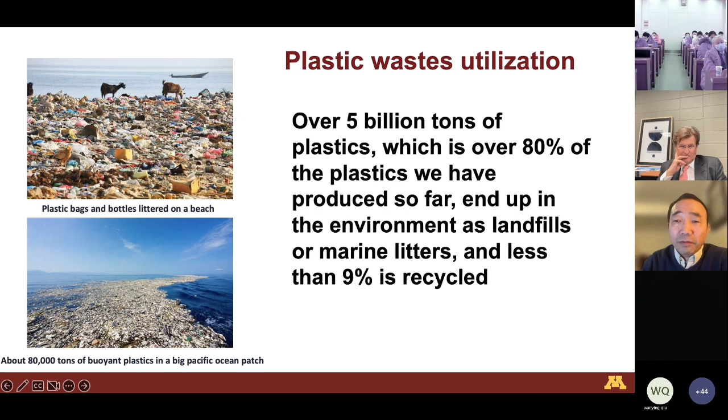Plastic waste is everywhere and polluting our environment. In fact, over 5 billion tons of plastics, which is over 80% of the plastic we have produced so far, end up in the environment as landfills or marine litter. Less than 9% is actually recycled.

So this waste plastic can be converted into valuable fuels like gasolines, diesels, jet fuels, and hydrogen, or chemicals like naphtha or light olefins and so on.

This technology has actually been licensed already to a company in California for plastic to fuels and chemicals production. But our objective is to develop a sustainable way to utilize this waste plastic to improve the financial outlook of the plastic waste recycling industry and help create a truly circular plastic economy.

Therefore, the key is for the microwave-assisted pyrolysis to produce the feedstock for new plastic production, feedstocks like naphthas or aromatics and light olefins, because they can be used to produce new plastics.

This is actually naphtha produced from polyethylene, and the liquid yield is about 70%, with about 52% of these C6 to C12 paraffins and 17% of these olefins, and then 14% of C6 to C12 aromatics, and 17% of these C13 plus hydrocarbons.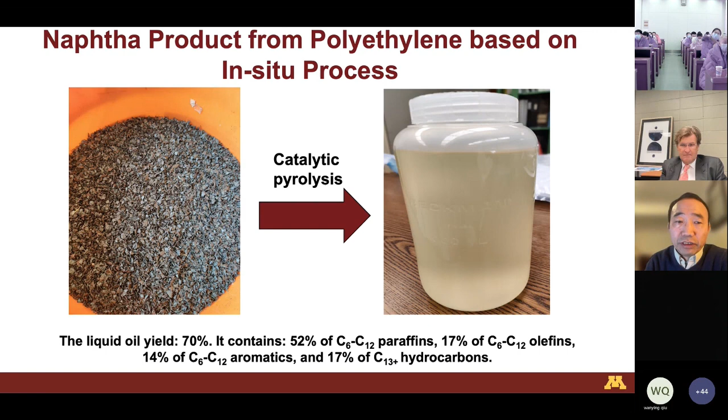But those are produced using in situ type of catalysis. In in situ catalysis, the catalyst itself and the plastic beads are mixed together. The catalyst often experiences rapid deactivation due to carbon and ash deposition, and it's very difficult to separate the catalyst from the char and ashes in the downstream process for regeneration and reuse.

So we have developed this kind of ex situ catalysis process. In other words, only the volatiles go through the catalytic reforming system to be reformed to produce these fuels and chemicals.

In the ex situ catalysis process, you usually want a high surface area, or small particle size. But when these small sized particles pack together, they create a lot of pressure drop, and also limit heat and mass transfer, so the catalyst actually deactivates fairly fast.

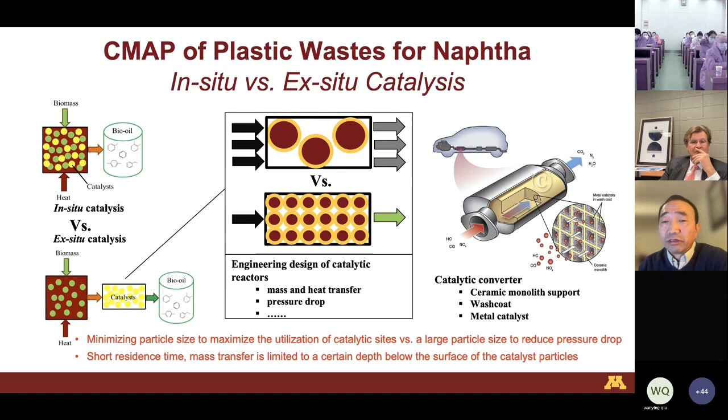To solve these problems, we have developed structured catalytic reactors. We use silicon carbide foams or monolith forms as catalyst support, and because they have very large void fractions and a lot of air cells, they can substantially reduce the pressure drop and still maintain very high surface areas, resulting in turbulent vapor flow through these foam structures that significantly improves mass and heat transfer.

You pretty much don't have much of a pressure drop anymore. So these SEM images show these silicon carbide foams coated with zeolite catalyst, under different magnifications. You can see the pores and voids are not really blocked at all. Under higher magnification, you can see the zeolite coated uniformly on the surface, and you can see the zeolite crystals, about 1 micrometer in size.

We actually compared the catalyst stability and life between the granule catalyst and the structured foam catalyst. For the granule catalyst, after only about 150 minutes you have a lot of wax produced, and these catalysts pretty much deactivated already. But using the foam structure ones, it improved quite a bit.

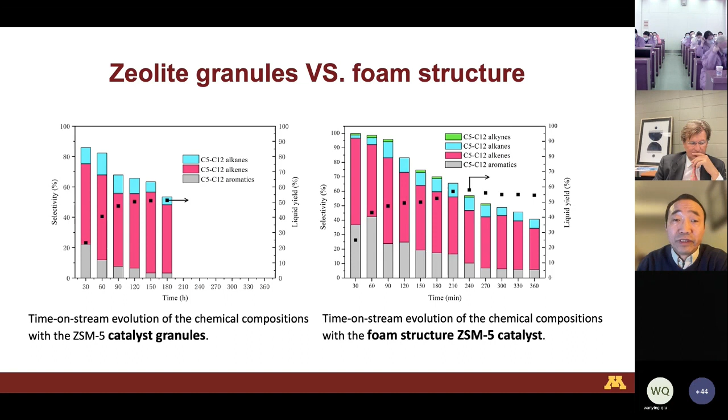Of course, the catalyst itself is still the most important factor. So we have used different modification protocols to fine tune the two key parameters affecting catalyst life, basically the catalyst acidity and the pore structures. Of course, we don't want to affect the zeolite framework and topologies.

This shows the modification of the catalyst to optimize the Bronsted acid site densities, which strongly affect the catalyst lifetime and aromatic selectivities. Only when these Bronsted acid site densities are in a certain range, for example between 0.5 to 0.9, does the zeolite present the best performance in terms of catalyst life.

Now for the pore structure modification: for the conventional ZSM5 catalyst, the pore size is very small, actually preventing these larger wax molecules from entering the pore structures. That limits diffusion of these intermediates and blocks the pore openings, resulting in very fast deactivation of the catalyst.

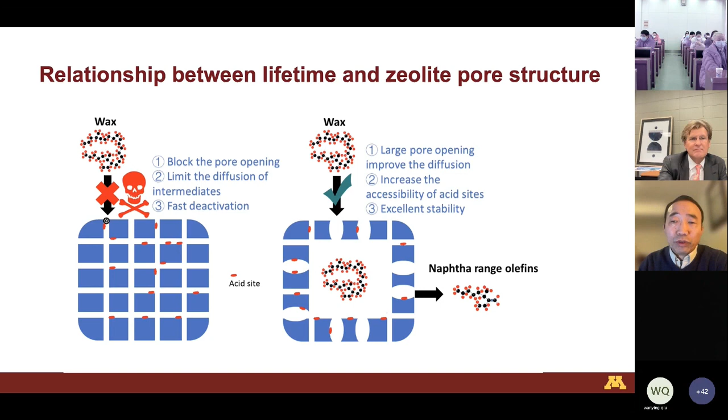We therefore modified this zeolite to have a hollow kind of structure, which creates mesoporosity that improves catalyst life quite a bit. I'm not going to get into the details, but basically the conventional ZSM5 catalyst was dissolved and recrystallized in tetrapropyl ammonium hydroxide solutions to obtain this hollow ZSM5 zeolite.

Here you can see the conventional catalyst has a uniform rectangular structure without macro pores in the crystals. These two here, D and E, are after this modification. You can see larger voids inside, around 10 to 200 nanometers.

If you do the Fourier transform, you still see a perfect crystal image and crystal structure after the treatment, indicating that the treatment itself did not affect the highly crystallized structure of the zeolite. We also used XRD patterns and so on to verify this.

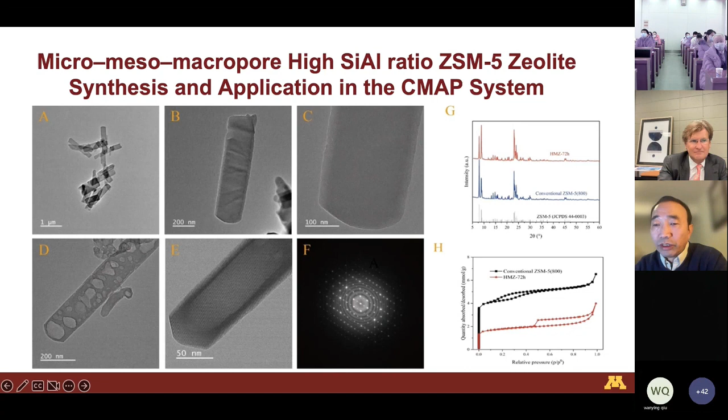This is the pore size distribution of the modified ones versus the original ones. You can see the modified ones have a mean pore size of about 32 nanometers, while the original one is only about 3 nanometers. So the internal pore size increased dramatically.

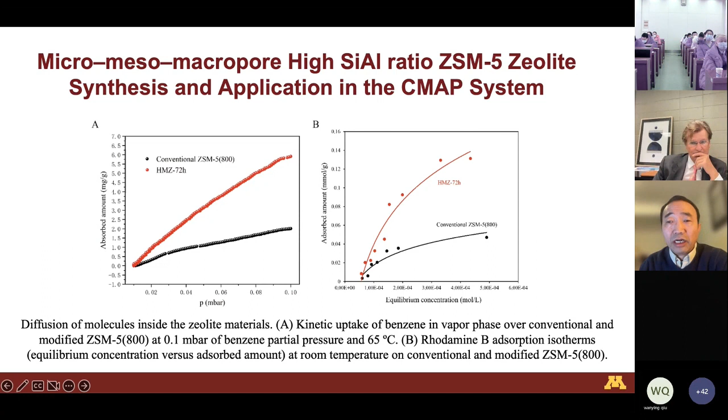The diffusion of molecules inside the zeolite materials is also confirmed to be much better for both cases in the modified ones as compared to the original ones. We also looked at the aluminum species distribution in this ZSM5-800.

In other words, a lot of these aluminums are actually going into the in-framework structures, so they actually help improve the acidities also.

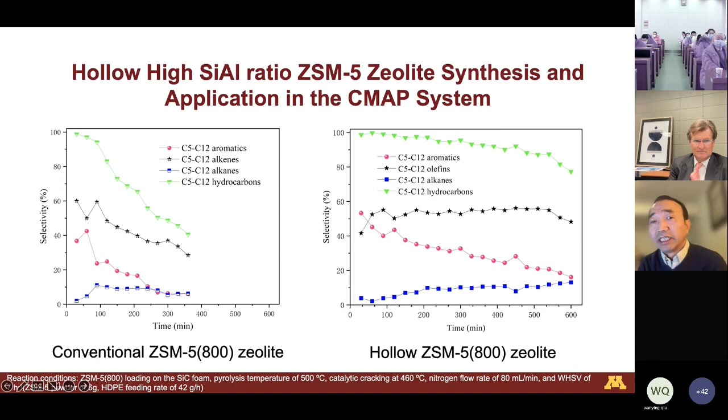This is basically the actual application of these modified structures. As you can see, without modification, these C5 through C12 hydrocarbons dropped below 90% in very short time. But for the modified ones, even after about 500 minutes, it still maintains around 90%. So the catalyst life improved dramatically.

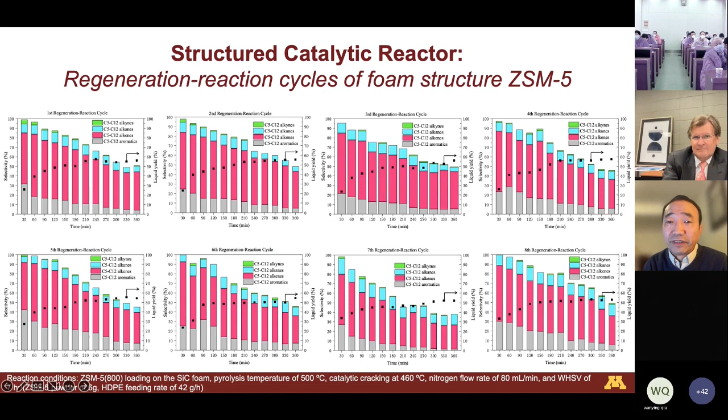And we have actually verified that we can regenerate these catalysts very efficiently. Even after 8 times regeneration, there's pretty much no change.

So we have applied these kinds of catalysts in the direct conversion of waste plastic into BTX and also light olefins. This way we can produce these for new plastic production easily.

There's still a little bit of uncondensable syngas remaining, basically hydrogen and C1 through C4 hydrocarbons left. So we go through a chemical vapor deposition process to actually produce these carbon and hydrogen materials.

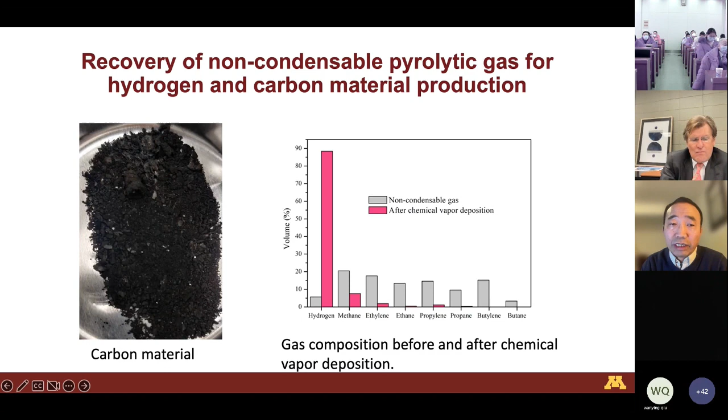Our preliminary data verify the feasibility of this whole process. The results indicate that when these non-condensable gases pass through high temperature reactors packed with different kinds of catalysts, they can produce carbon materials and very high selectivity of hydrogen.

We can also deposit these carbon materials onto a nickel foam or other forms like iron structures. Then, in this case, after the nickel is removed and dissolved away, you can produce 3D standing, freestanding graphene foams, for example.

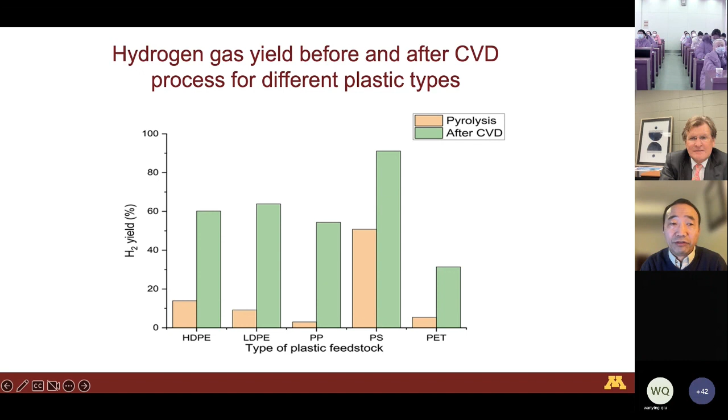You can see the hydrogen yield from different kinds of plastic using the CMAP pyrolysis and catalysis systems. This is HDPE, LDPE, and so on, before and after—you can see the hydrogen yield, as shown in this table.

2 minutes, is it all right? Okay, yes, 2 minutes should be fine.

As shown in this table, the hydrogen selectivity can increase by 4 to 5 times after this process.

This is basically a kind of quick energy and mass analysis. You can see that 1 ton of plastic produces about 450 kilograms of naphtha, and then some diesel, and some synthetic natural gas and so on.

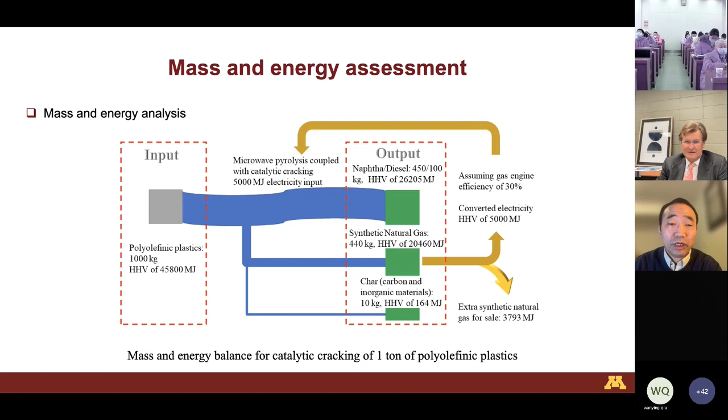I'm not going to go through much detail, but this is actually based on a very small 1 ton per day system. With larger scale, it should improve further.

In summary, there are many advanced technologies that could effectively treat solid and liquid waste through utilization, therefore helping achieve the circular economy and sustainable development, including some of the processes I just mentioned. These processes mainly use electricity only—there's not much other chemical consumption.

Electricity, of course, can get greener and cheaper in the near future, I hope, with all these renewable energies and remote generation of energy. Then certainly these technologies could become much more practical.